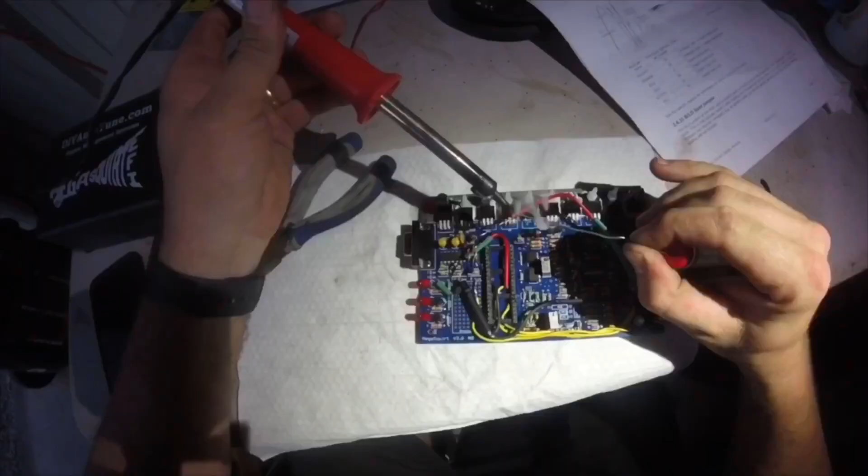So it's Friday, actually, no, Saturday night. Yeah. Friday night, we did not end up doing anything with the Z because we got some nasty storms here in North Texas. So we decided to just postpone to tonight. But we got our Greek food in us, and now... It snowed today, too? Yeah, it was snowing this morning. So it's been kind of crazy weather today.

But today on the docket, first of all, we got the intake manifold for the 2J. We don't need to bust it all out. Little sneak peek there. Baby. I'll drop some video here when we got it out of the box. It's beautiful. Great quality for China. Very impressed. So we got that, but another thing we got is new struts. So those are just stock struts.

We have some S13 coilovers we were thinking about going with and just welding them to the stock strut tubes on the Z, but we're concerned about weight transfer. Sure. We already have some pretty stiff rear suspension, and the last thing we want to do is make the front really stiff and lose all of our weight transfer on the launch. You know, we like for the nose to come up some. Yeah, we like to dig hard. So yeah, we want to be able to keep traction. The back of the car is so light, without weight transfer, it's just gonna bust the tires loose all the time. So the plan is stock struts on the front.

We got some new brake hoses, just because the ones that are on there are actually like super cracking shit. I'm really surprised that none of them are leaking, and we haven't lost control and died, but yeah, we were going about 120 miles an hour with just, I mean, they're really bad, about as bad as you've ever seen. Don't worry, we'll get you some video. So we'll kind of show what's going on there.

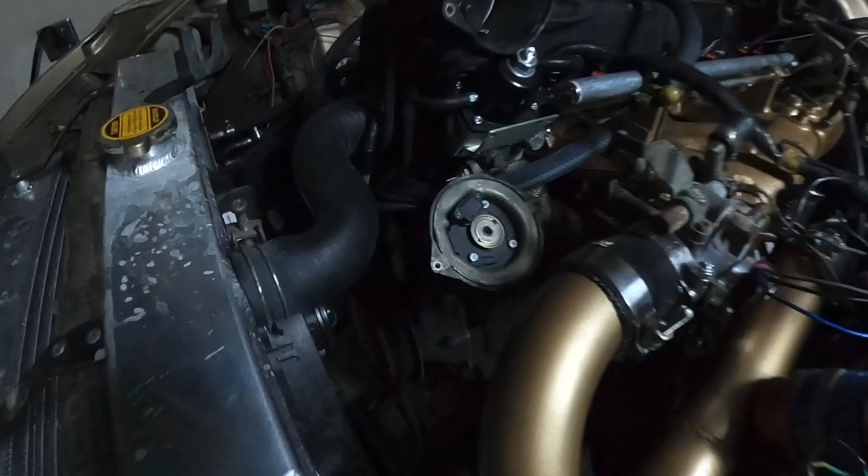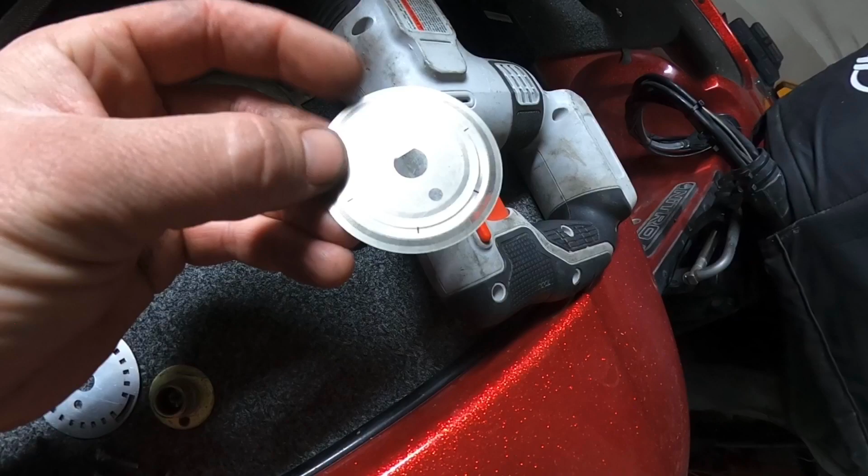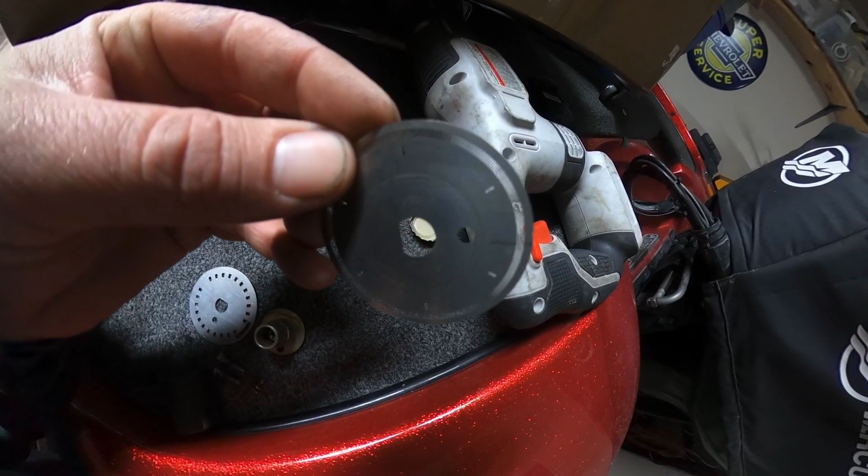These pliers are spectacular. All right, so Matt's still working on getting the struts out, but I got the distributor apart. So you can see what we do there. You just pull off the rotor, and then there's like a little cover. You take it off, and then this is the factory trigger wheel. It's got 360 tiny slits on the outer edge, and it's got 6, you can't really see, it's all scraped up, 6 larger slits on the inside of that ring.

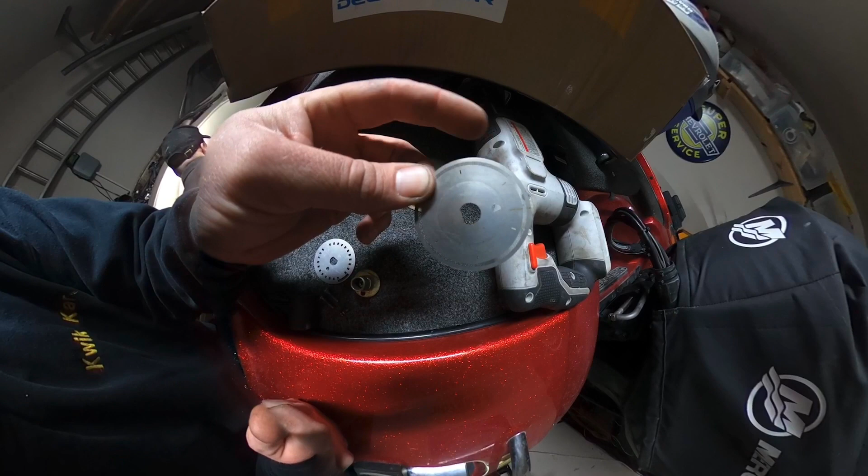And so it gets low res from the 6 slots, and it gets high res from the outer ring with the stock ECM, but the MegaSquirt doesn't know what to do with these 360 slits. If we're going sequential, we need cam input. So that's when we use this wheel. This wheel, we're gonna set it up to run crank trigger off of these little squares right here, and then it has this inner gate right there that is going to give a cam signal.

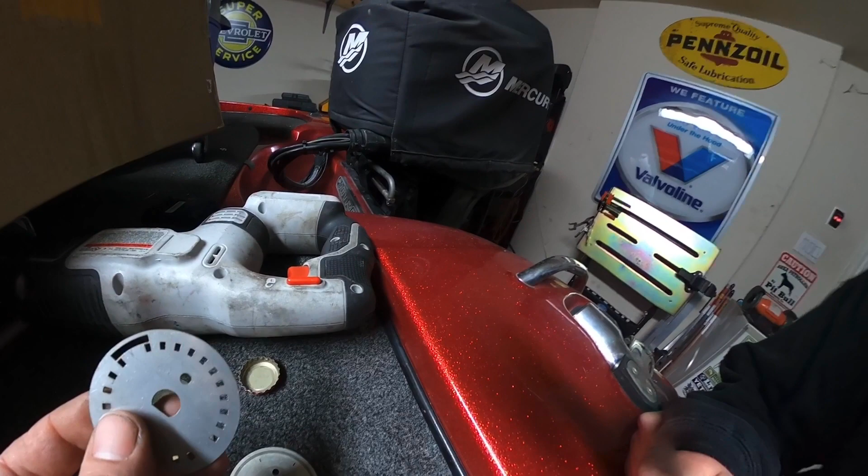So on DIYAutoTune's website, we're able to find the procedure to install this and the orientation, and in here we'll also be able to find how we need to set up TunerStudio to make it all work correctly.

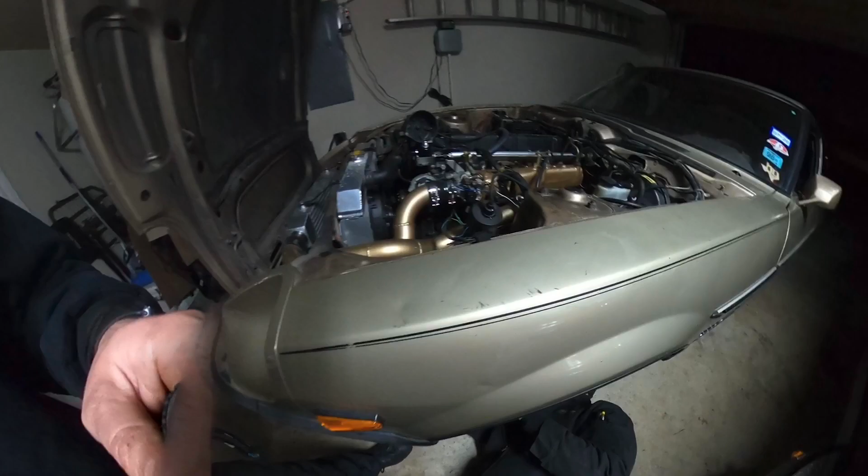So we got the trigger wheel in place. Didn't we just do an alignment on it? Yeah, but we're taking all this shit off. Oh, it won't need much. So we'll set that in. And I think the last time we did one was like over a year ago. And just got a Phillips head that goes in the middle of that, and that locks it all down.

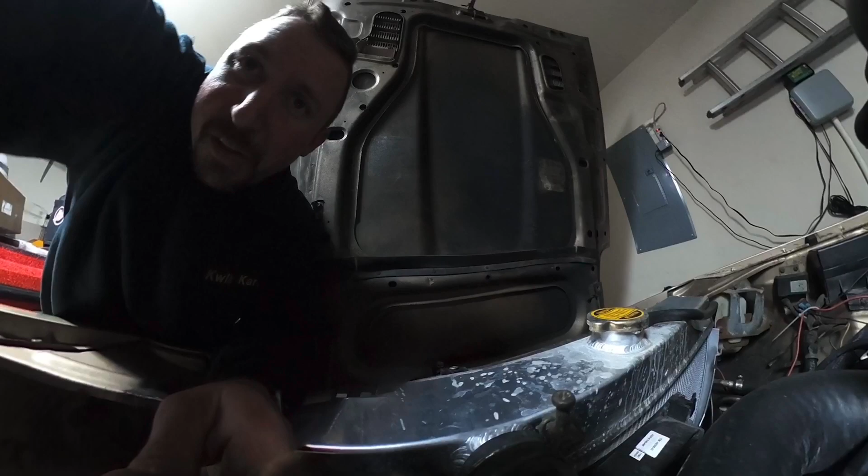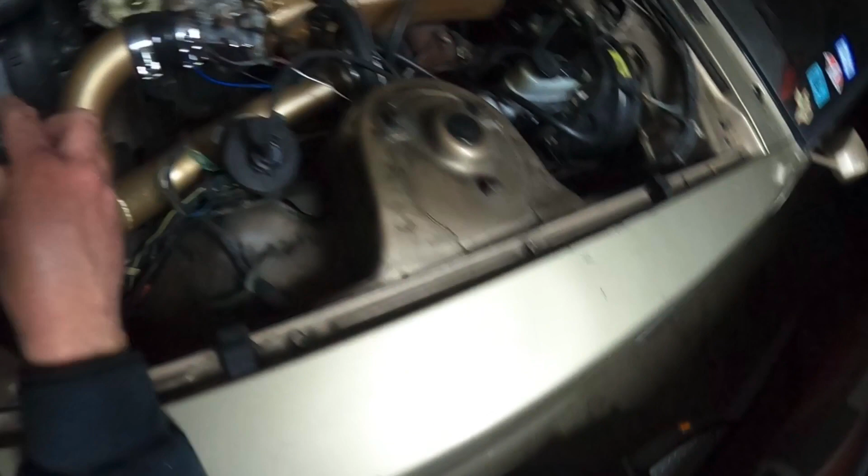Make sure you get her nice and snug. This is a rotating component, so proper torque is definitely important. Ooh, yeah, I feel like this has some pressure behind it. I got a plate to put in there. It's fine. And it was just pushing down against the bolt at first, so I was like, what the hell are you talking about? And then we're gonna tighten our rotor back into place there. As simple as that. Then the rest is pretty much software related.

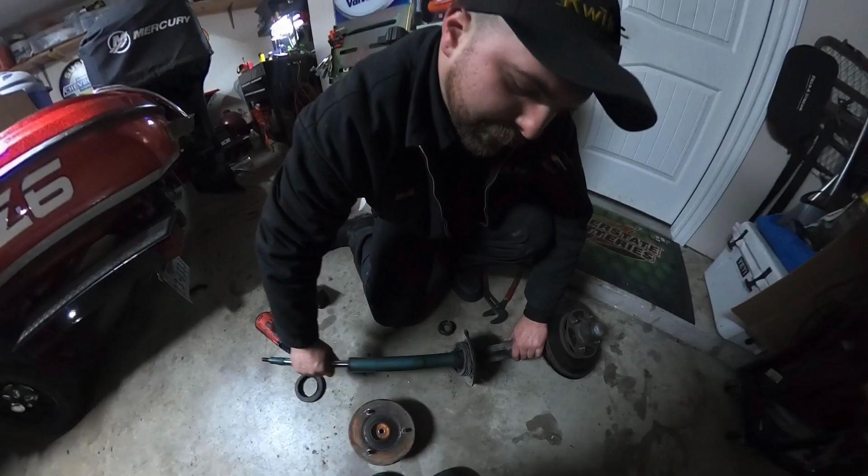All right, so we got the whole strut assembly out of the car. And so the way these struts work, they're just inserts. Oh! It was just soaked in oil. That thing has been leaking. It's blue. It's kind of cool. Stinks. Yeah, it stinks real bad. It smells like good old 1980s Japanese petroleum. So that's all you replace is the insert, and what you're left with is the same tube and everything.

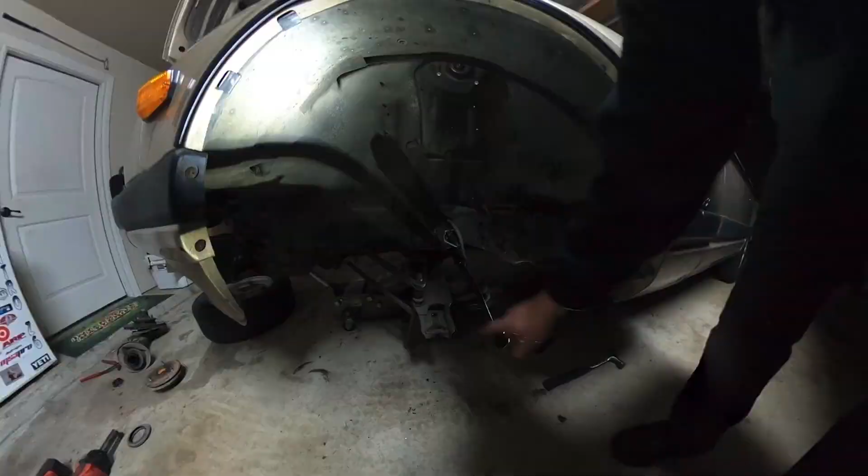Shaft. Get that thing out of here, it's dripping everywhere. Throw it in the dumpster out in the driveway. So that thing was definitely effed, and I imagine the other one's gonna look much the same. Pretty easy to get out. Ooh, sexy. Baby. KYB's factory replacements, and in that box there's also another one of the little nuts for it, and there should also be another bolt or a nut for the top of that.

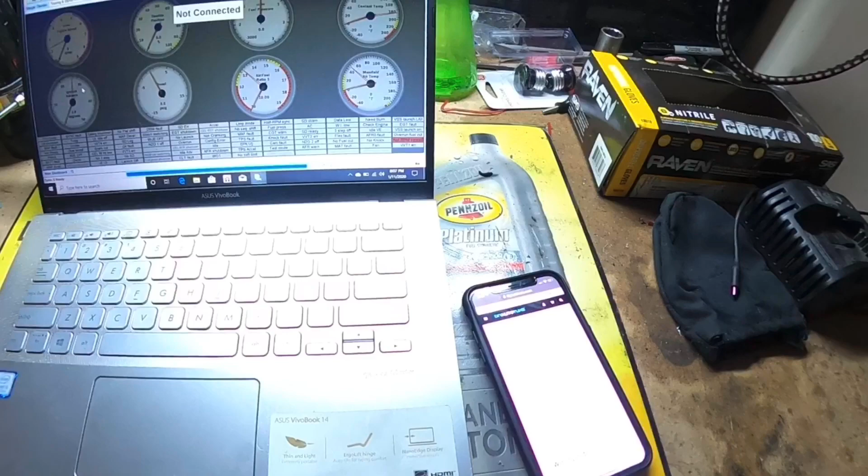And over here what I'm working on is I got the DIY specs on the new optical wheel, and I'm just going to go into TunerStudio and see if I can get all the parameters for crank input set correctly so the Megasquirt knows what it means. Then we'll try to start it up before I try to do anything sequential, just to make sure it's happy the way it is. We actually need to check the timing on it. We'll have to reset the base timing.

Instructions. You're right. This guy's a pro. Oh. Well, you should have seen him shaking when he got that spring compressor on there. Springs make me nervous.

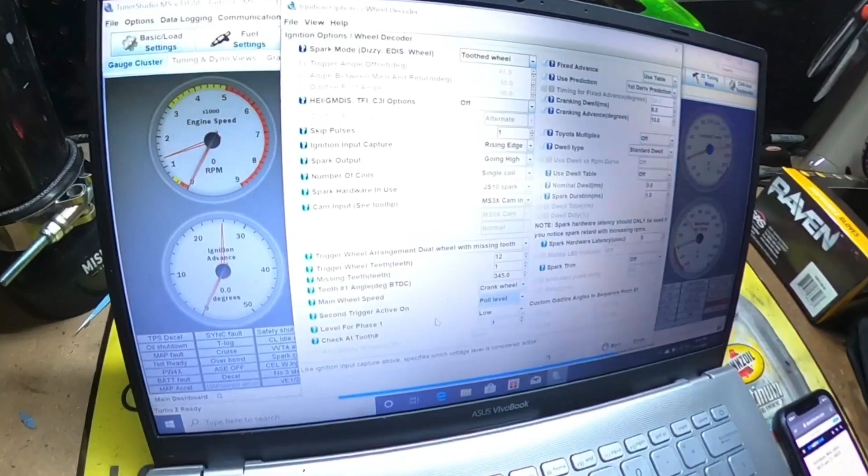Alright, so I got all our new parameters in. We had to change a lot of this stuff. We had to change the spark mode, we had to change the spark output, actually the ignition input capture. Lots of these parameters were changed, completely different. But it's all right here on DIY Auto Tune, so it kind of takes out the guesswork there.

This is a lot heavier. Matt's got the new strut in place and he's going to install it back in the car. This thing is heavy now. I know how heavy it is, dude. What do you mean? You think it's heavier with the new strut? Feels like it. No way. No, it's because I'm the one who picked it up out of the car. You never got to feel it.

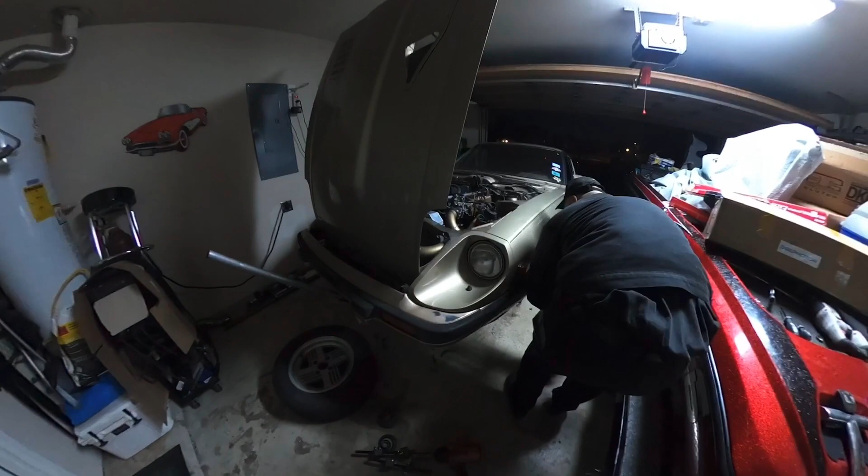Alright, so feed that thing up here and I'll start one of these nuts. And then you can relax. I'm gonna make you strong. Oh, real close. Push up. Now wiggle, wiggle, wiggle. Just rotate it slightly clockwise from your angle. There you go. Oh yeah. That one's... So, just... All right, get it out of here quick. Yep. Whoa, I heard that. That was a washer or something. Probably nothing.

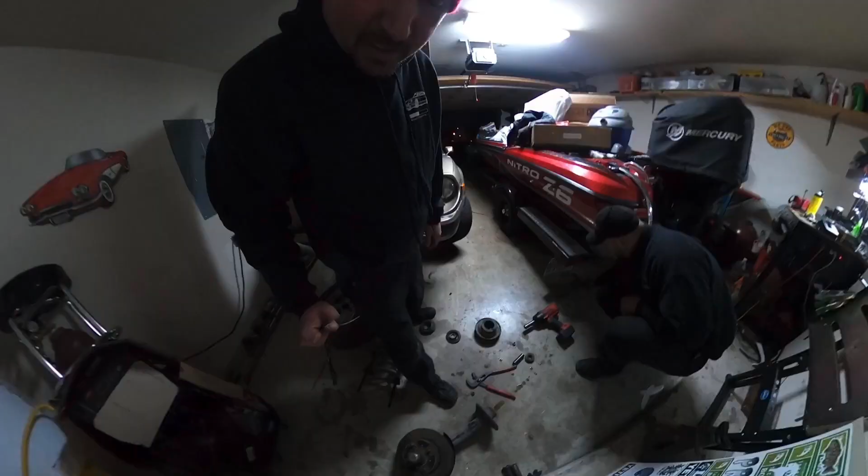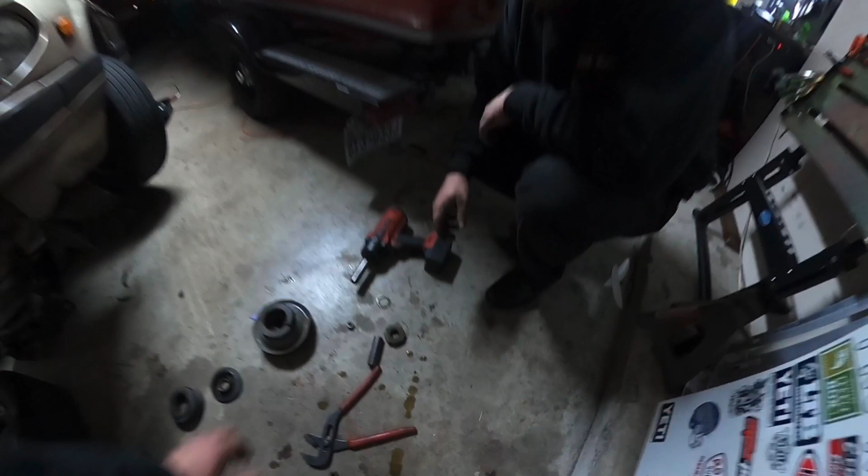Who knows? So Matthew's over here working on the right hand strut. What is that? What's that? That must have been one that just fell out. Well, where the hell did that come from? Was it like sitting on top of it? Like that? Actually, I think there was one stuck in the other one, yeah. Okay, cool. Alright, the new strut's in there. And we got one more brake hose to do on that side, and then we're good on the front end.

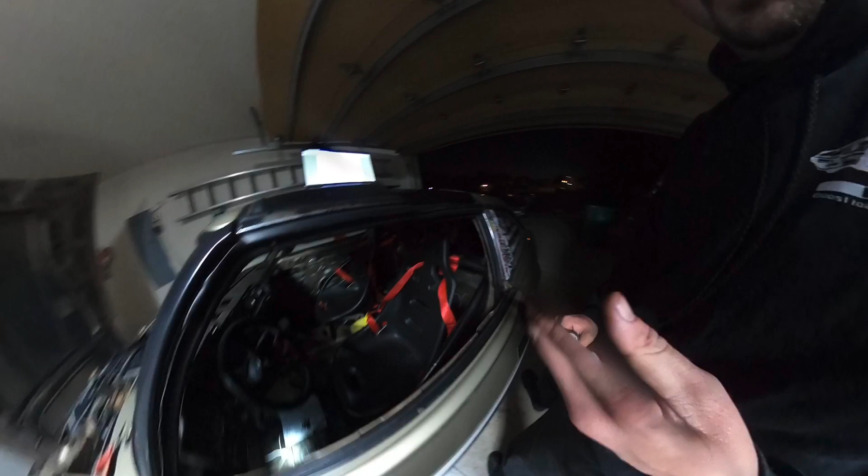And over here, what I'm working on is I have located the circuit we need that comes from the distributor to where the stock ECM was. Now I'm adding a pin to the MS3X connector there, and I already got it soldered on there, so then all I have to do is connect that wire to our other crank signal wire, and then we will have a circuit that inputs our cam position, or presumed cam position, into the Megasquirt.

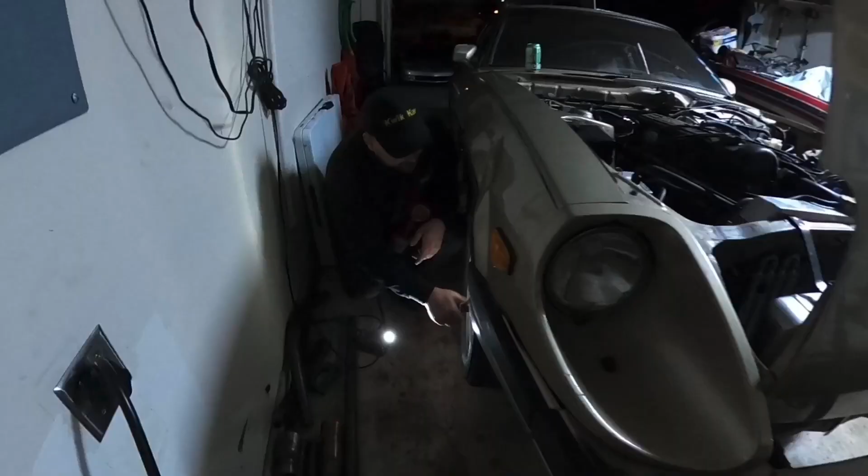And so then I'm hoping I can just set it up to start looking at that input, and it'll just work. But at least I'll have it wired in, and we can see on Tuner Studio if we're getting a cam input. All right, so we got the new shocks installed. Just got done bleeding the brakes out. Matt's just getting the wheel on now, and everything looks good there with the shocks and the new hoses.

Everything's good. I attempted to start the car up and see if I can get any indication of cam signal. And on Tuner Studio, there's just a little block that says cam fault, and it was lit up. So I got back online to MS Extra to see if I could find what we might have done wrong. And it's pretty simple. The cam signal wires right into the MS3X card. So there's just a pin, you wire it in, and that's pretty much it. But there are some adjustments that I was supposed to make on the board itself. And you can see here I have the Megasquirt cracked open.

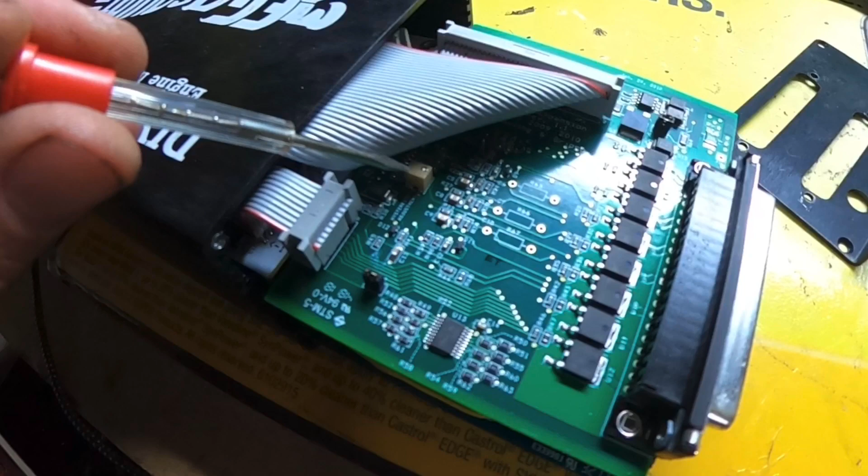And it's probably real hard to see on the GoPro, but if you look real close, right here, there's a little, I call them pots. It's like a pot resistor, and it's got a little screw on top of it. And turning that screw creates different values. So I read up and figured out that for the cam signal on the MS3X, if we're using an optical sensor like we are, then we should turn 7 turns counterclockwise on pot 11 and pot 32. And so I've done that.

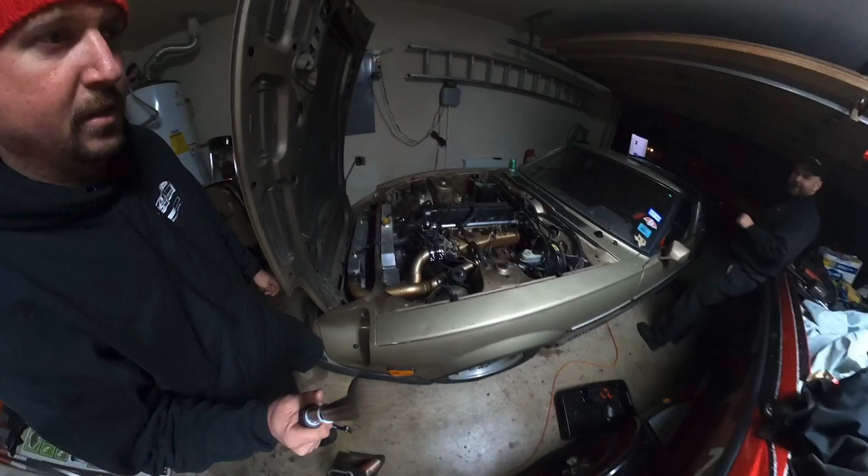It looks like it's sitting higher. It should be sitting the same. I mean, the spring is what determines the height, not the strut. It looks like it's sitting a little higher to me. Maybe not. That gap just looks a little bigger. Oh, it's tight, dude. Yeah. Oh wow, that's way different. Yeah, it's way better. Man, that's gonna make a huge difference in the handling. Yeah, baby. Cool, I like it.

So I'm gonna get the Megasquirt, throw it back together, throw it back in the car, and see what happens. And hopefully the cam signal's clean now. If not, that's probably something we'll figure out throughout the week when I got some time. Can't run this damn thing a whole lot later than we're at now. So,

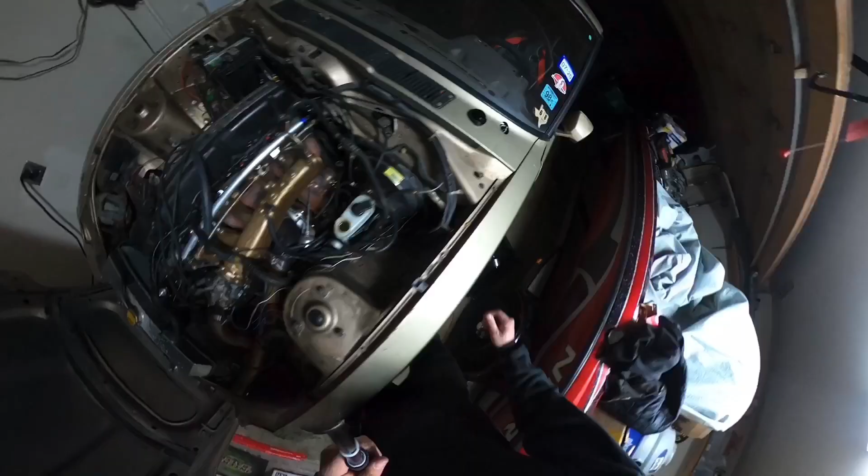once that's done, oh look, Matt left the brake fluid reservoir cap off. That jerk ass idiot. Oh hey, let's get all these tools put away, dude. All these tools. All these, one set of tools. Pliers. Wow, dude, you see those pliers though? Where are they gonna go?

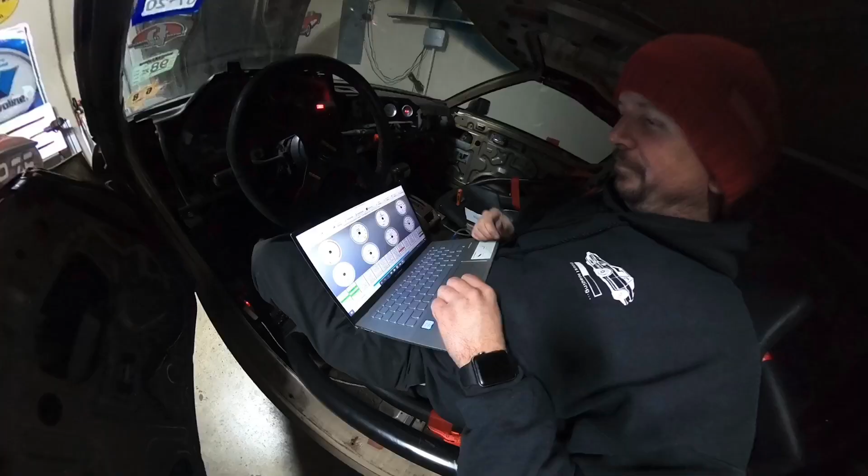Get this Megasquirt together. All right, so what we're looking at is down here where it says cam fault, this little block right there, and hopefully it's not red. Well, shoot. Well, I got some more homework to do, I reckon. Yeah. Oh, we got some stuff done tonight though, for sure. Yeah, I got the new trigger wheel in. We got the circuit ran for the cam sensor going to the Megasquirt. So just gotta figure out how to.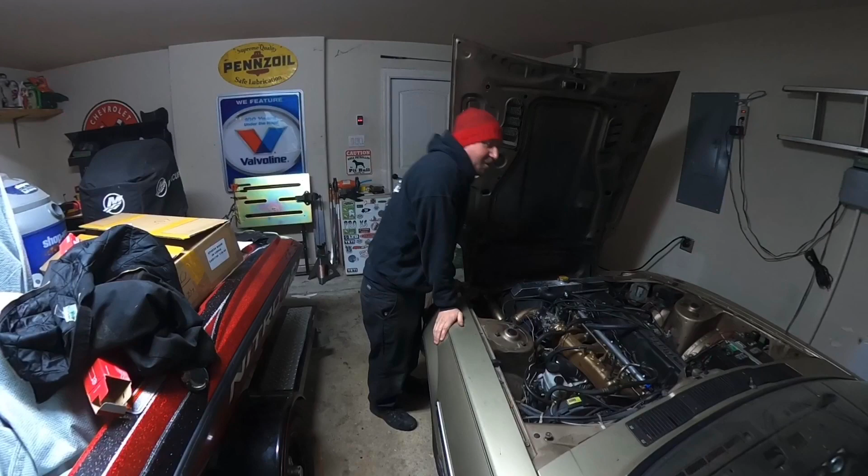Yeah, dude. And man, these things are just gonna make a huge difference. This thing was just so bouncy before. Yeah, it really was. So much better, dude. Can't wait to take it on the street. And we got brake hoses. One of the brake hoses literally just crumbled into pieces when we were removing it. Terrible. We were relying on those brakes pretty heavily. Some of the worst I've seen. Seriously. Cool, so I guess that's gonna do it for now.

I'll see if I can get some updates on the cam sensor situation. Probably just throughout the week, hopefully I find some time to fix the cam sensor signal and then get the sequential up and running.

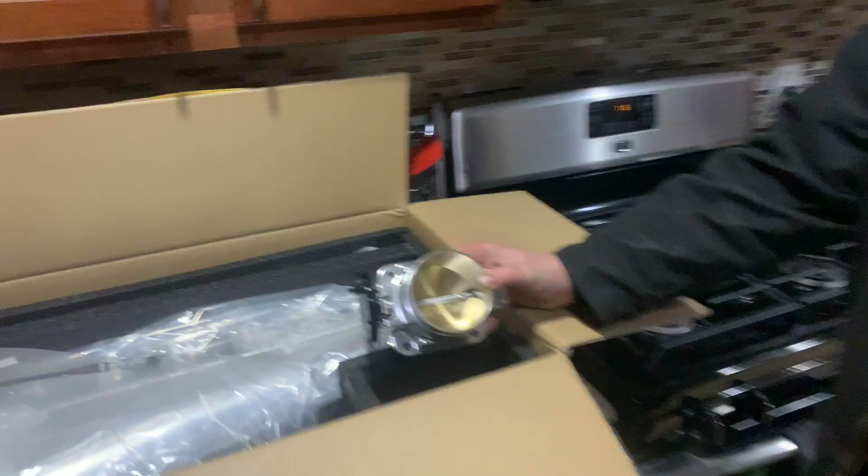The new intake arrived. Look at this throttle body. Wow, it looks nice, dude. Looks real nice. Came with a throttle cable. Wow, the machining on it actually looks really good. Look at the edges. Some nice billet pieces here. Thank you, China. Wow, look at the good welds too. Got the fuel rail. Really good. Worth every bit. Bunch of hardware and gaskets and stuff. And get out the piece de resistance.

What the heck is going on? You coming up? Dub wants to see it too.

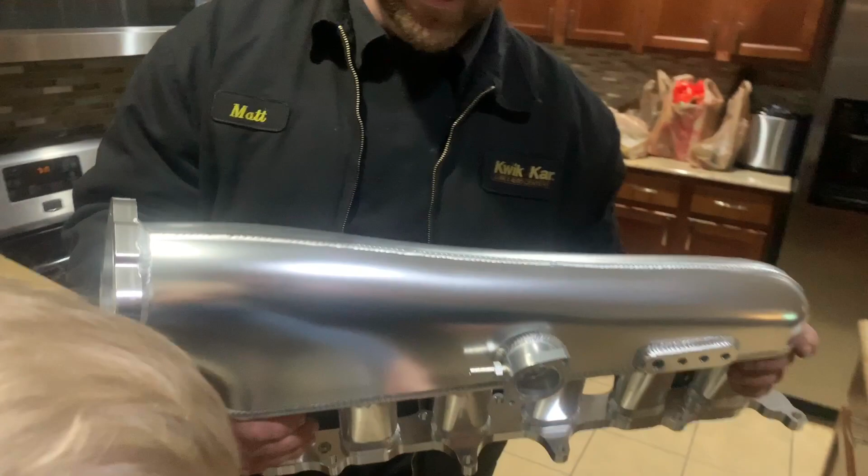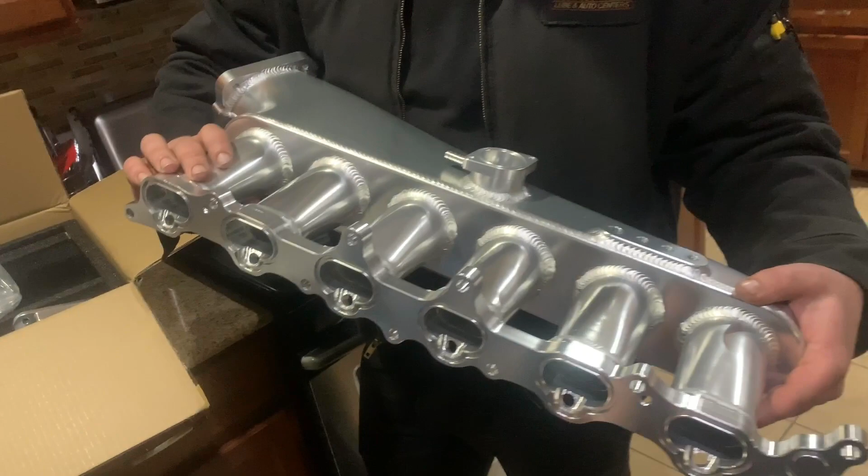Wow, it's bigger than I pictured. Whoa. Look at the size of the intake. That's really big. Wow, it's huge. Oh, it's so pretty. Dude, look at those welds. This looks like quality material here. Look at the flange, the O-ring grooves. Wow, it feels really good quality. Wow, this looks nice, that's so cool. Thanks, China. Thanks for letting us afford nice things. I can't believe how nice the throttle body is. A throttle body like that would be a few $100 in its own right.

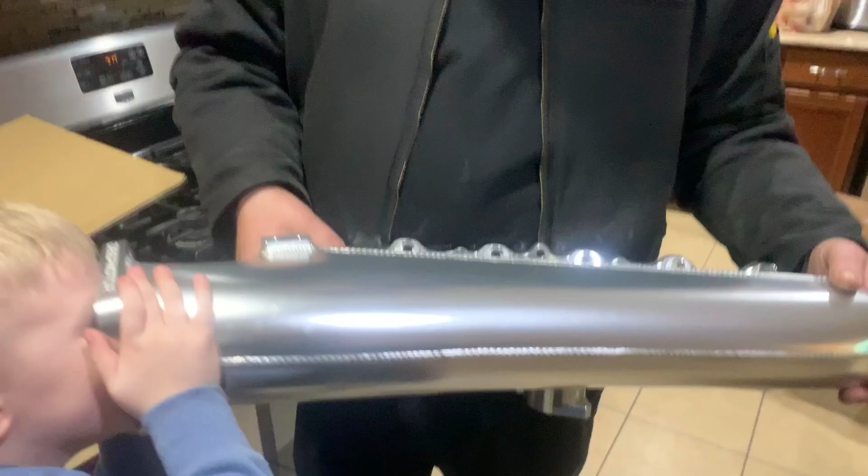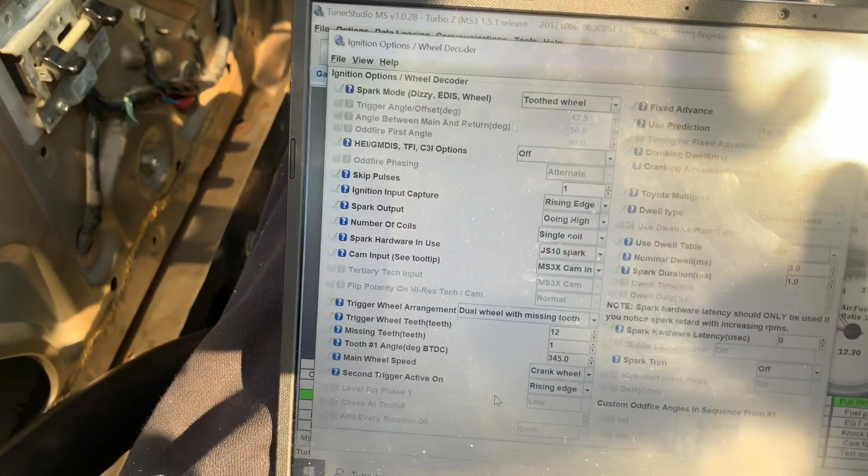Got the cam sensor to sync up. You can see cam fault is not lit any longer. And up here you can see full RPM sync. So what I had to do is, I had the input for the cam set up as an optical sensor, which was wrong, even though this car does have an optical sensor for cam and crank signal. It's not supposed to be set up as optical. It's actually set up as variable reluctance just because of the way the signal comes out of the distributor or out of the crank sensor.

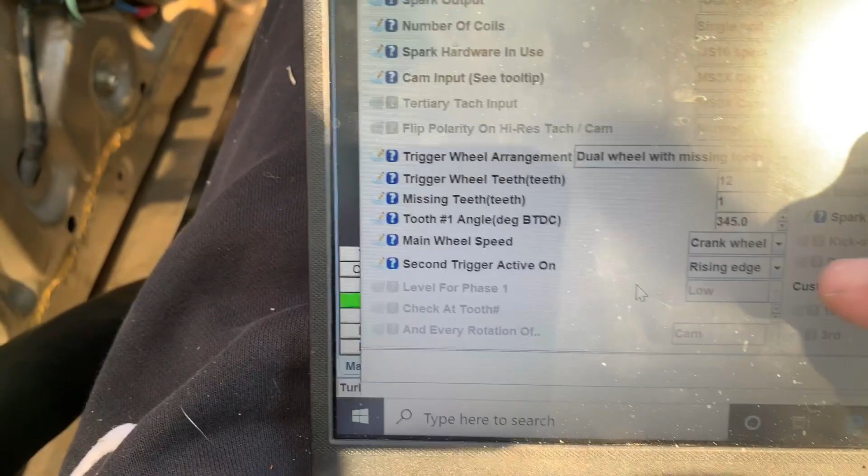So I had to change a jumper inside the Megasquirt, which was real easy, and then I had to change the trigger to rising edge. And now we have RPM sync. So now I can actually work on getting our sequential fuel injection set up, which is super exciting.

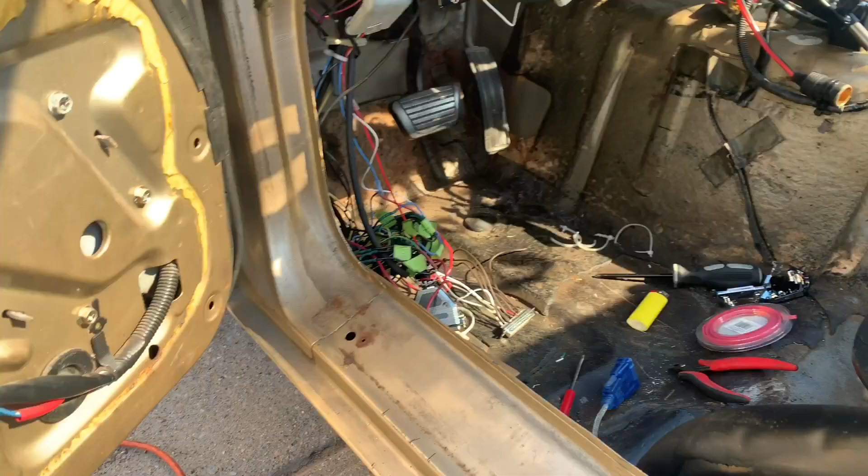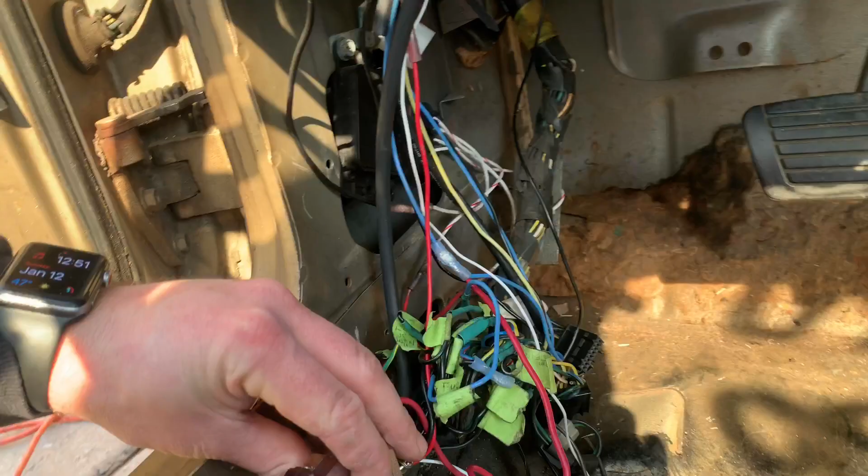All right, so here's the mess of wires that is my main harness for the Megasquirt. This is kind of an abomination. This probably makes a lot of people uncomfortable to look at. Right here are my 6 injector wires for the control side. And here is the connector for my MS3X.

And I just finished soldering on these brown wires here. I got 6 of them on the correct pins down here. And those are going to be the ones that we're gonna be connecting to these in the proper firing order. And that should be how our sequential works. After that, I already got TunerStudio set up for it. So just kind of getting through it one wire at a time.

Well, things escalated really quickly with this whole project. I got all the wiring done, everything was finished, everything was good. All I had to do is reinstall the Megasquirt into the car. I got it down next to the connector and went to plug the connector in. And as soon as I thought the connector was plugging in, I started seeing smoke come out of the module. Turns out the connector was flipped 180 degrees, which it won't plug in that way. But evidently I angled it just right to at least make some contact, and it started smoking from inside.

I took it inside, tore it apart. I didn't really see anything burned up. So I put it back in the car and got it all plugged back in, and it's not communicating now. The fuel pump's not priming. Nothing's happening. I can't communicate with it. So I don't know what's fried, if it just fried the whole thing, like the whole CPU, or if there's just a circuit somewhere that got cooked that I've got to figure out.

So I don't even know if the sequential fuel injection would have worked. I don't even know if I did all that right. I mean, I really have no idea. So now I get to deal with that problem.

Okay, so actually got a little bit more information. I pulled the Megasquirt apart. I went ahead and just put it back together real carefully and diligently, and came back to the car just because I was getting ready to order a motherboard. But I came back to the car and plugged it in, and now it is communicating. So that's awesome news. I still got my crank signals working, my cam signals working, all my temperature sensors and throttle position sensor, everything actually seems to be working just like it should.

Except one thing, the fuel pump's not priming up. When I turn the key on, it doesn't prime up. So hopefully all we have is like a damaged transistor or something relating to the fuel pump. Oftentimes what happens when you jump voltage the wrong place is you just fry a resistor or a transistor on the main board, which is pretty easy to fix. Well, it's fixable anyway. So I'm going to dissect that circuit that controls the fuel pump and see if we can figure out what we need to do to fix this thing.

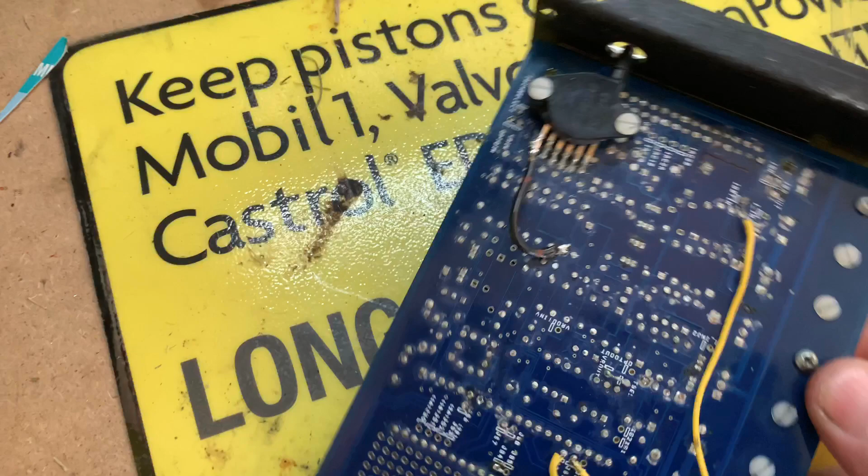So I think I found the problem. The only area of the board that looked even remotely burnt was the circuit right here. Right here in the middle, you can see how dark it is. And at first I just got my DVOM and touched on the end of it over here and then over here, and I had continuity. But then I touched it and this little ribbon just totally flaked off the board. It wasn't like that. Obviously, that's a problem.

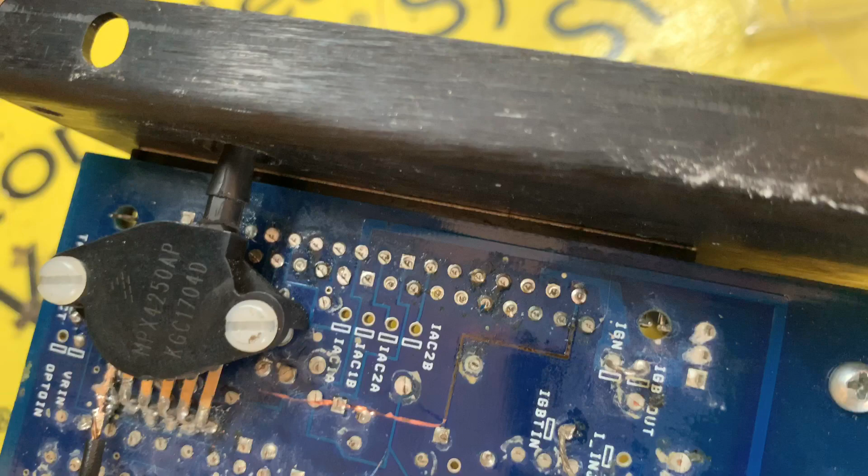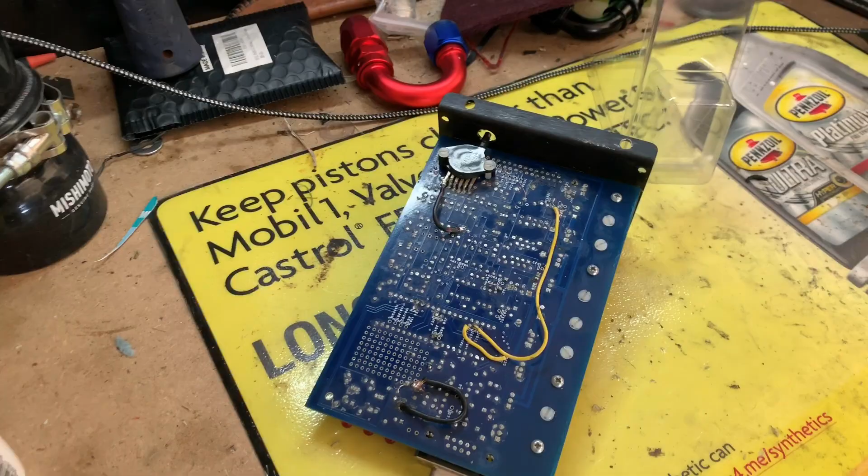But this little circuit makes this little zigzag and then goes to that corner soldered point right there, and that is for fuel pump control. So all I need to do is solder a little wire from that little square guy over to that little corner guy without letting it touch anything else, and I think we'll be back in business. So here's hoping. I'm gonna solder a little piece of wire in there real quick, throw it back in the car and see if we're out of the woods. Hopefully everything will be right with it after that, and it'll be like this never happened.

All right, so I just jumped my little wire there from one pin to the other, made sure it wasn't bridged to one of these other terminals, and everything looks good. So I'm gonna go ahead and slap the other board back on top of it and just plug it in, see if the fuel pump kicks on, and then we'll check and see if there's any other damage or malfunction.

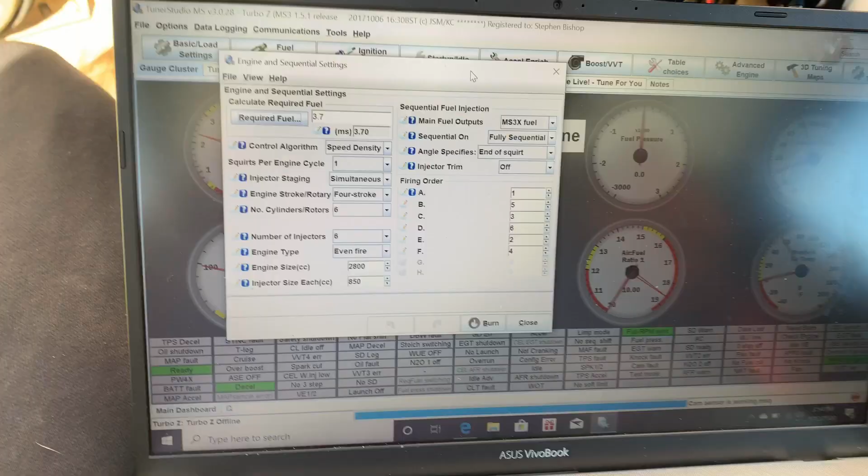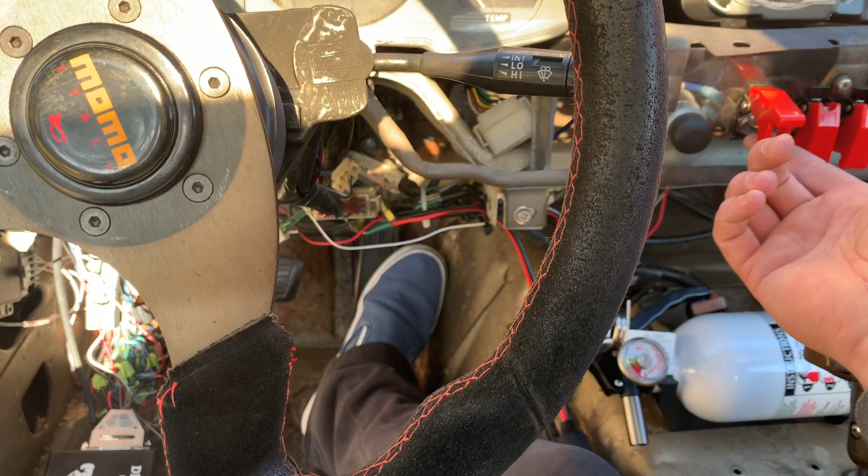All right, so I got the module plugged back in after making my repair. We got communication, and when I turn the ignition on, you hear the pump kick on, but it's just staying running. It's supposed to just do a little priming pulse, but it just runs continuously. So that's something I probably want to figure out.

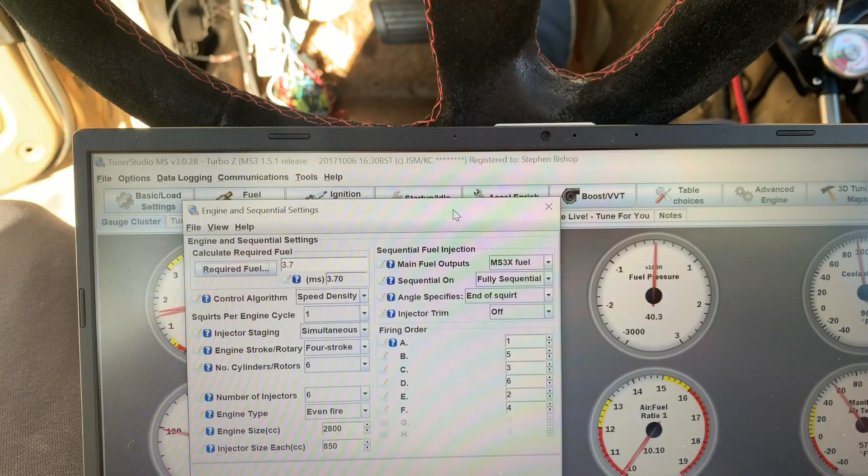But I already went ahead and tried to see if it would start, just because I wasn't sure if I'd have spark or if there was something wrong with that too. And it does run, and it is on sequential. It's running on sequential fuel injection. So that's pretty awesome. It is set on fully sequential MS3X.

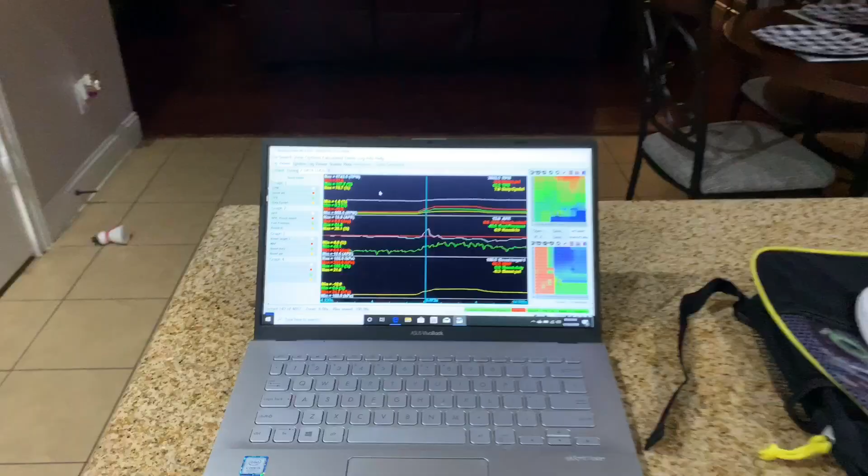...out why the fuel pump's just running constantly. It's got to be something else messed up inside the board. So one of the reasons that we wanted to go to a sequential fuel system is to take care of an issue that we have with pulsation in the fuel system.

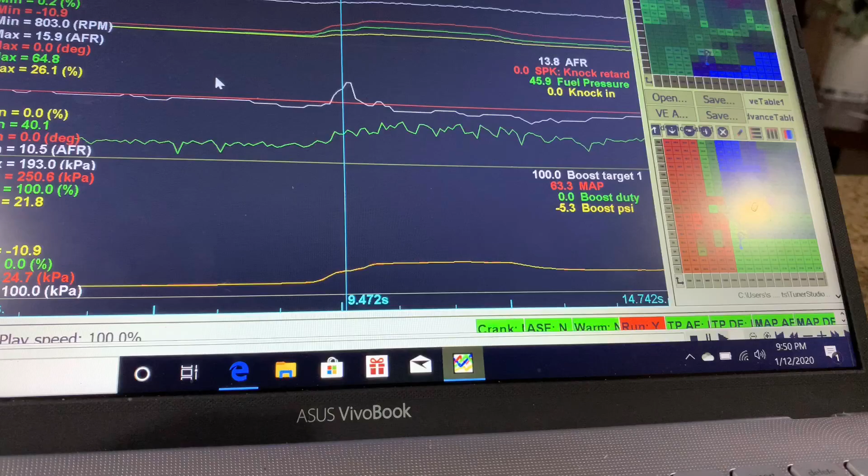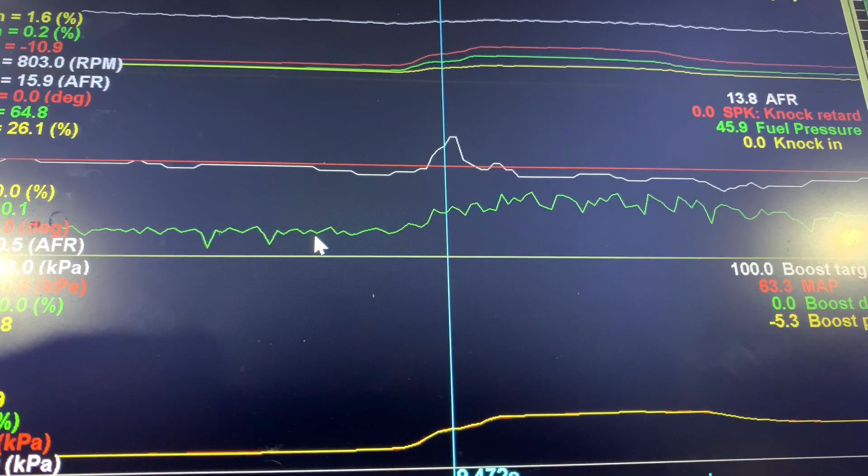So when we did the fuel lines and the PTFE hosing with all the AN fittings, we did eliminate the fuel dampener. And since then, you can see this green line right here is fuel pressure. And this is just sitting at idle without the dampener with batch fire injection, meaning all the fuel injectors fire at the same time once per cycle. And you see how the whole thing's just real squiggly.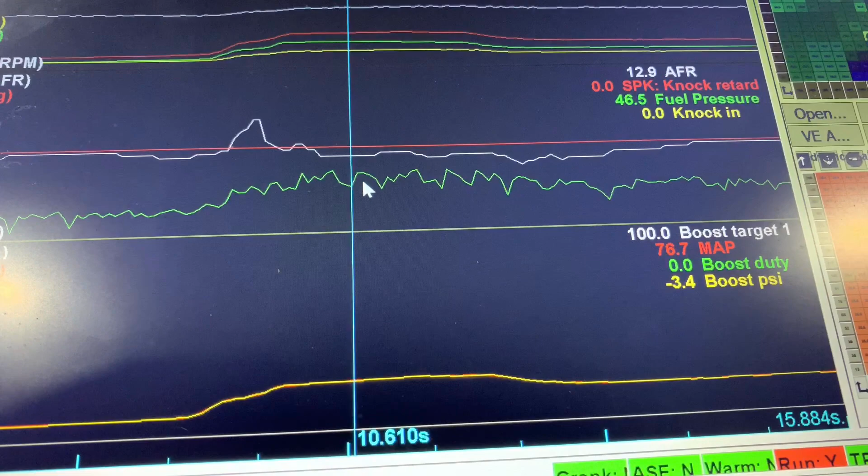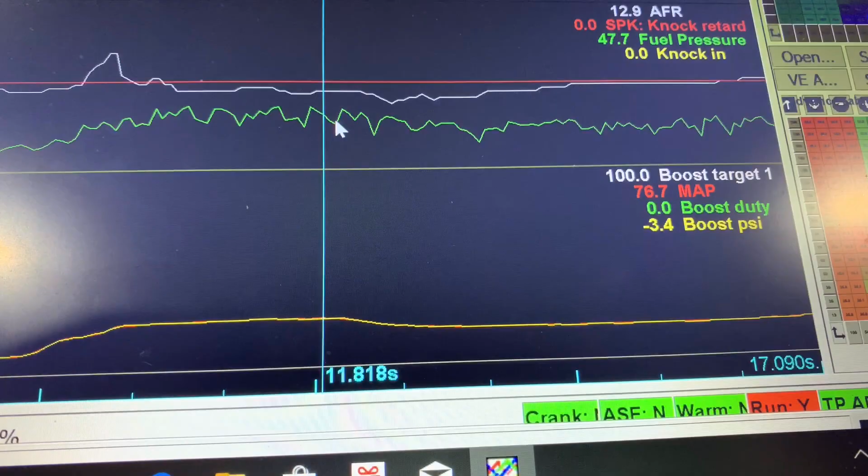And it fluctuates 2 to 3 PSI just constantly. And these are just tenths of a second. Like you see down here at the bottom of the screen, that is time. And so just within a couple tenths of a second, we're getting 2 to 3 tenths of fluctuation at all times. So now I'm gonna look at a data log of it idling with sequential injection to see if that smoothed out a little bit.

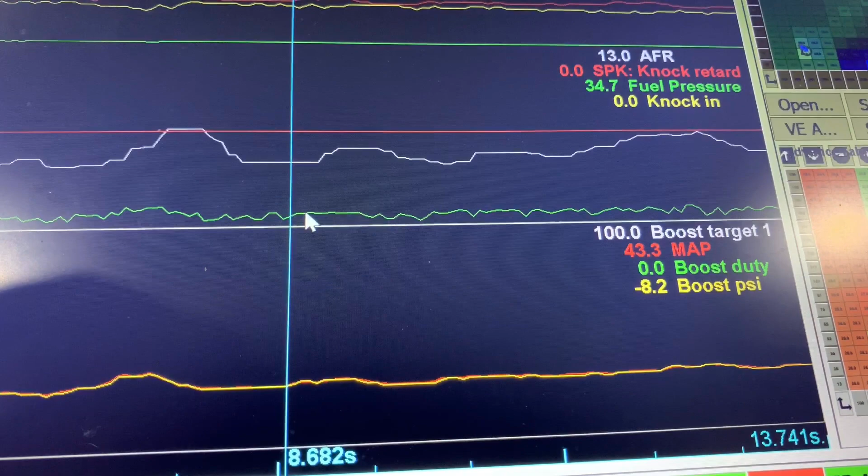So this is a data log of the engine just idling with the sequential fuel injection. And you can see the line is still squiggly, although the frame of reference is a little different because I only idled the engine on this one, so the data log is kind of zoomed in. But if you look at this number up here on the right, you can see that it only fluctuates a couple of tenths at a time, for every couple tenths of a second. So it basically holds within 1 PSI.

And actually that's kind of low. I actually had to raise the fuel pressure up from there. That was just from making the changes to do the sequential. So actually it normally runs about 45 PSI at idle under vacuum. But yeah, you can definitely see that it did make a huge difference.

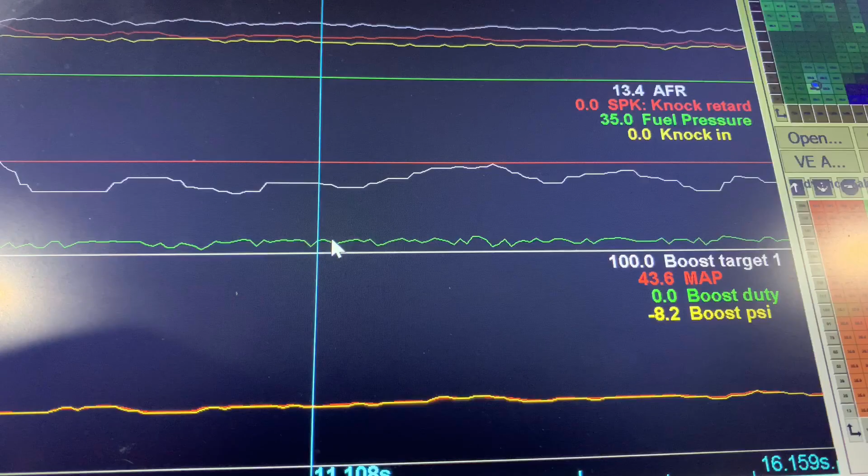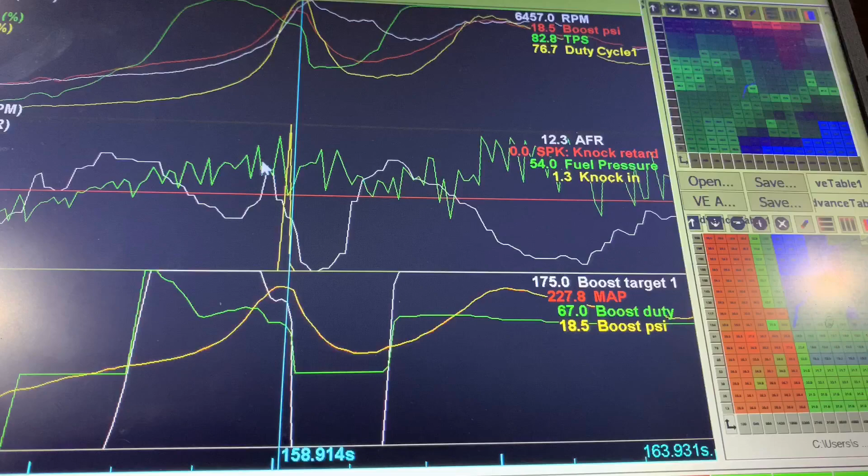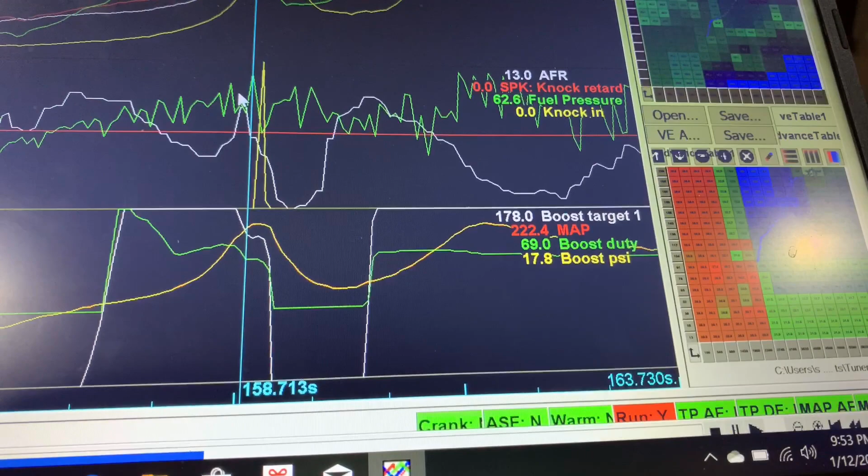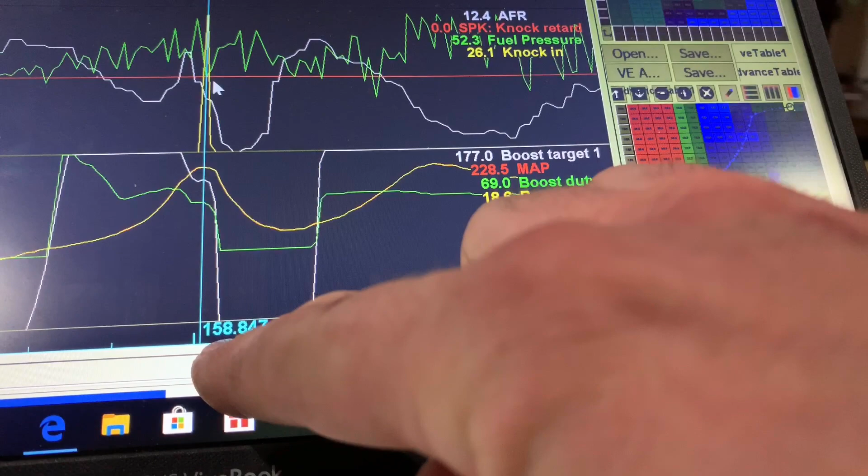Now the real reason that I was concerned, not for a couple of PSI when idling, I don't care about that. What I was really worried about was, here you can see that whenever we're actually making substantial boost, so right here is about 18 PSI, the fuel spiked, so right there's 62 PSI, and that's at 158 seconds. And then right here, still 158 seconds, and we're down to 52 PSI. So there is a jump from 62 PSI to 52 when under high boost.

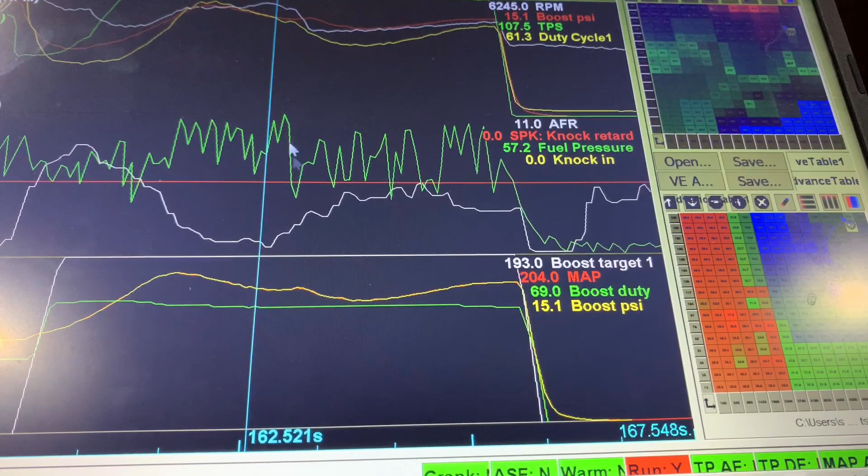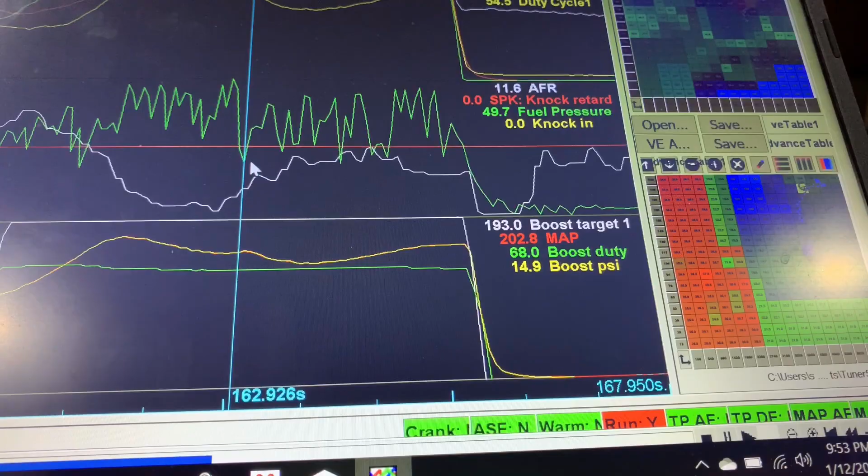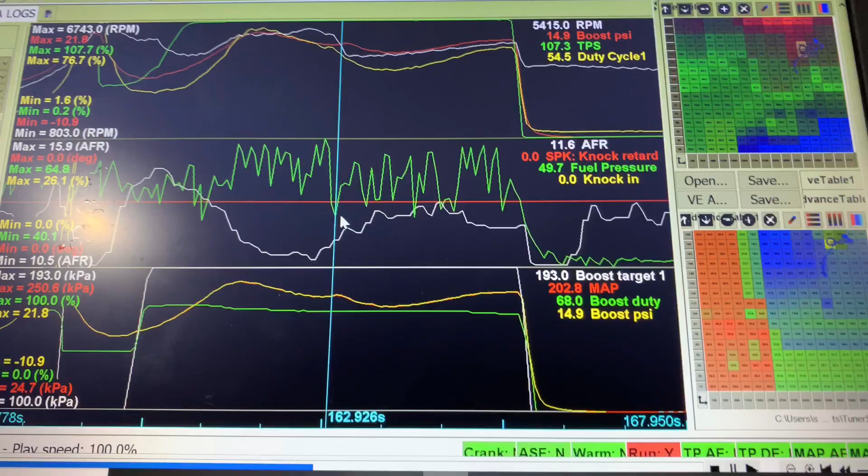That's the biggest spike, but you can see it just stays that way while we're up there in boost. And right here again, this is about 15 pounds of boost, and the oscillation in the fuel pressure is just extreme. Right here we got 64, and then less than half a second later, we got 49. So it's just significant oscillation of the fuel pressure. And that's why it was so important to make the change to sequential. Just not having the injectors all pop at exactly the same moment is going to help keep the fuel pressure more smoothly maintained and more stable.

Well, I haven't yet gotten a chance to make any high boost pulls with the sequential injection. A lot of weird stuff's going on with the car right now. As you know, I fried a circuit on the circuit board. I've repaired that, and everything seems to be okay for the most part. The fuel pump is staying on with key on instead of just doing a prime pulse. So something's shorted in the MegaSquirt that's keeping the fuel pump grounded.

It's not really a big deal, honestly. I'd like to fix it, but with the ignition on, most of the time the engine's running. And even if it's not, it doesn't hurt the fuel pump to just run sitting there. The only concern really is killing the battery. So I'm not that worried about that. I want to get that straightened out.

But another thing is, since we went sequential, it was running really, really lean, to the point that it would barely idle. And I had to add a substantial amount of fuel on the VE table just to get it to idle. Just at idling, we're at like 90% on the VE table. And that's really high, and it's really unusual. It feels smooth, everything feels good, but I want to mess with the dead times and see if I can figure out what's going on there and get that all right. But otherwise, the car's running and everything else looks pretty good.